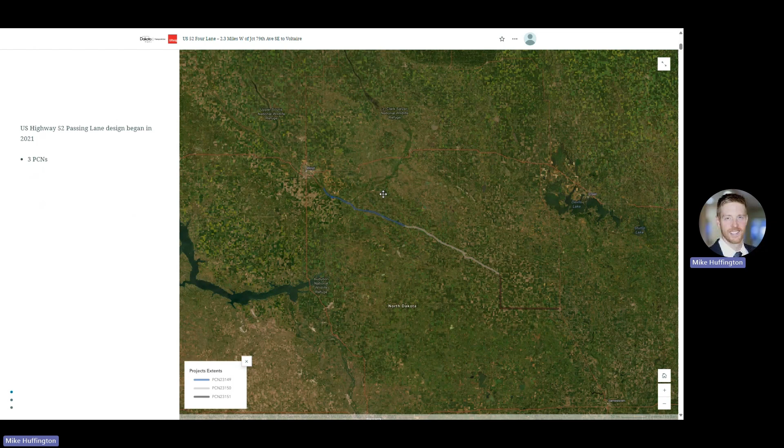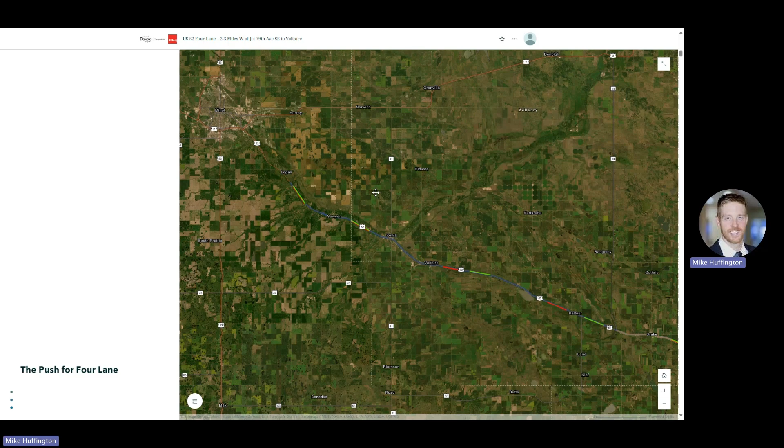So as you can see on your screen along this current corridor, there are eastbound and westbound passing lanes currently installed between Logan and Sawyer, as well as between Sawyer and Velva. As we were going through the project development process for the passing lanes projects, we received a number of public comments really pushing for four lanes, particularly for this segment of US 52 closer to Minot. Local leaders and elected officials heard those concerns, and during the last legislative session, were able to get funding allocated to initiate this four-lane study.

So real quick, I just want to touch on the phasing and schedule for this project. We currently are in phase one, which is the preliminary engineering study. As part of this phase, we're completing initial alternatives development and preliminary engineering, completing a lot of our field surveys, both topographic and environmental, completing a traffic analysis, starting this initial stakeholder and public engagement, and ultimately we will conclude with a decision document.

In phase two, the focus will be on completing an environmental document in compliance with the National Environmental Policy Act, or NEPA. And then finally, phase three, which would be final design, which includes that final design, right-of-way acquisition, and permitting.

Looking at the schedule, phase one is expected to wrap up the end of this year. We'll then be transitioning into developing that environmental document through 2025, which will include additional opportunities for public engagement and comment, and then final design through 2026 and the first part of 2027. I will note this project does not currently have funding for construction, so we do not have an estimated construction timeline.

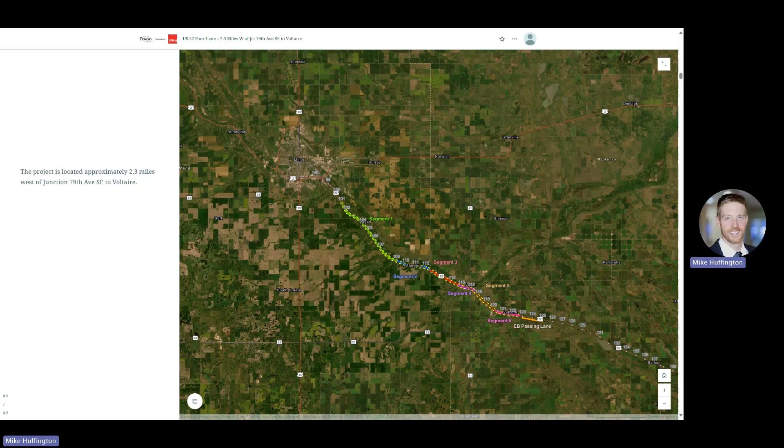Looking at our project corridor, our study area begins near Minot, where the current four-lane section of US 52 ends and goes until just past Voltaire, where it ties into an existing eastbound passing lane that was installed in 2023. We've divided the overall corridor into 6 different project segments, driven primarily by changing constraints and opportunities along the corridor, which I will expand upon in a little bit when we get to the alternatives.

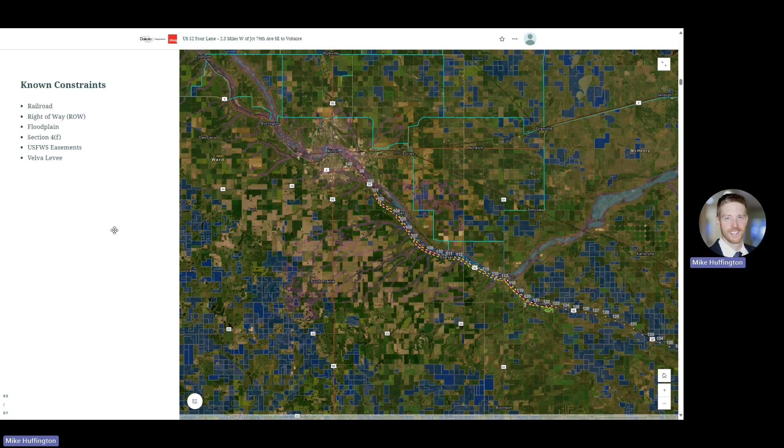As the project corridor begins to parallel the railroad, the amount of existing right-of-way narrows, and there's no longer that excess right-of-way to the south, and throughout the remainder of the corridor, the existing roadway is centered within the current right-of-way. Zooming out and looking at this stretch between Sawyer and Velva, the majority of this segment parallels the Canadian Pacific Rail line and is one of the more constrained segments of the project corridor from a right-of-way perspective.

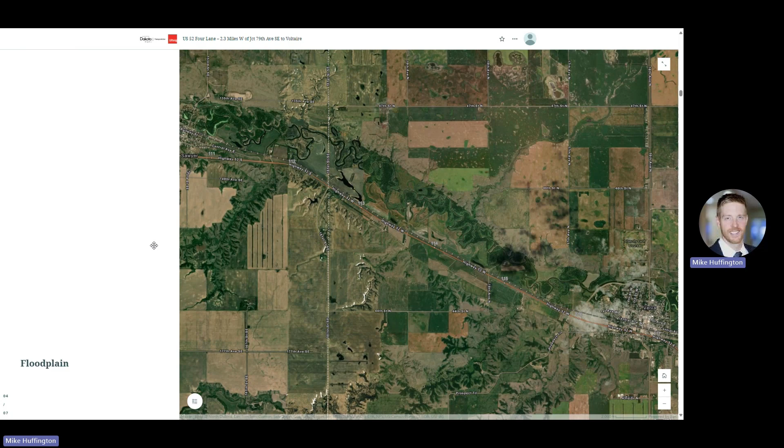Floodplains are another constraint. As you can see in this map, there are a number of FEMA mapped floodplains that cross the project corridor. So as we work through our project design, we will be coordinating with local floodplain administrators, and will ensure that anything we propose is in compliance with floodplain regulations.

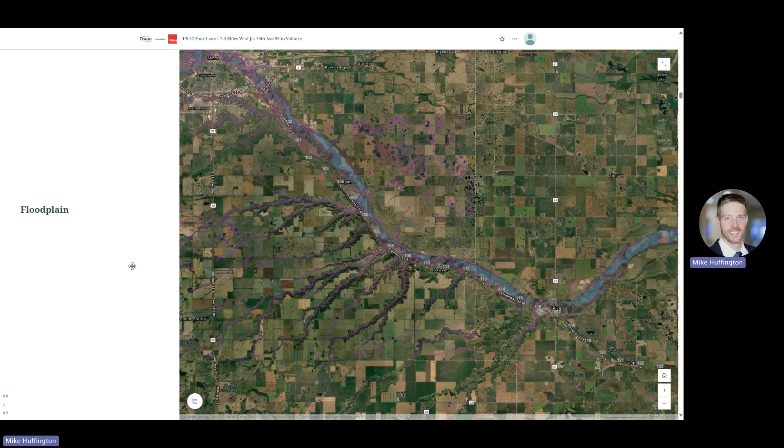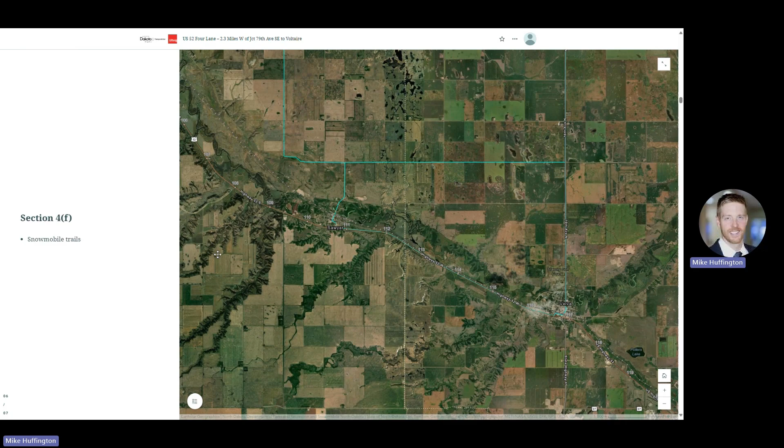Section 4(f) of the Department of Transportation Act provides protection for park and recreation lands, wildlife and waterfowl refuges, and historic sites during transportation project development. Along this project corridor, there is a designated snowmobile trail shown in blue on the screen, which is eligible for protection under Section 4(f). This trail is located within the ditch of US 52 between Sawyer and Velva, and is part of the project. We will need to ensure that use of that trail remains and is not limited or inhibited as a result of the project.

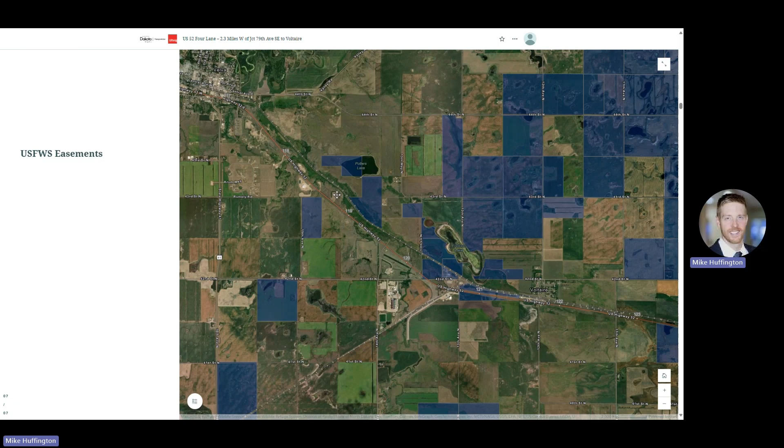As we get closer to Voltaire, there are a number of parcels along the project corridor that are subject to U.S. Fish and Wildlife Service wetland easements. If we are acquiring right-of-way from these parcels, we will need to coordinate with the U.S. Fish and Wildlife Service regarding potential impacts.

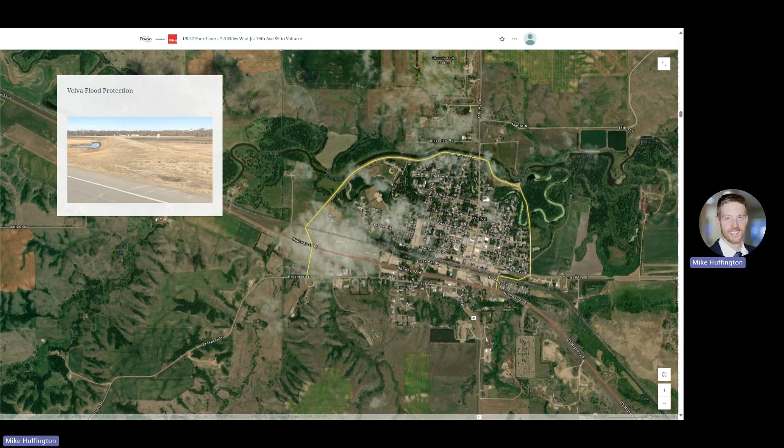Then lastly, the Velva flood protection levee. There is currently a flood protection levee around the community of Velva that crosses US 52 on the west side and abuts US 52 on the east. We have reached out to the U.S. Army Corps of Engineers and have had some preliminary discussions regarding this levee. Based on those discussions, we will need to ensure that our project complies with the Army Corps' Section 408 program, which provides guidance and regulations pertaining to the alterations of civil works projects.

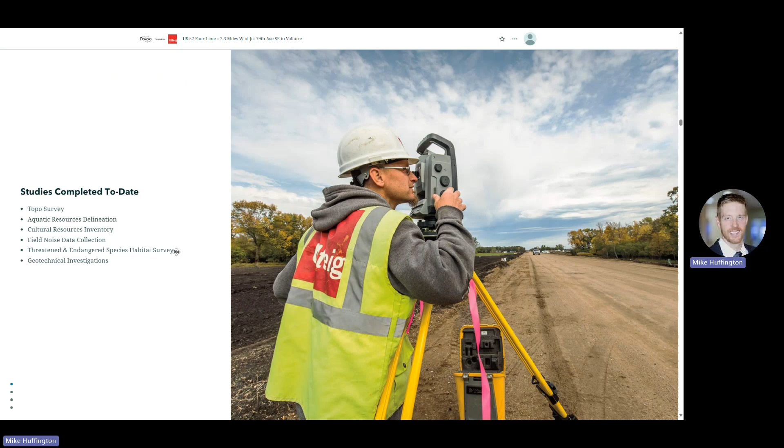I'm now going to touch on some of the studies that have been completed to date, which includes a topographic survey, aquatic resource delineation, cultural resource inventory, field noise data collection, habitat surveys for threatened and endangered species, and geotechnical investigations.

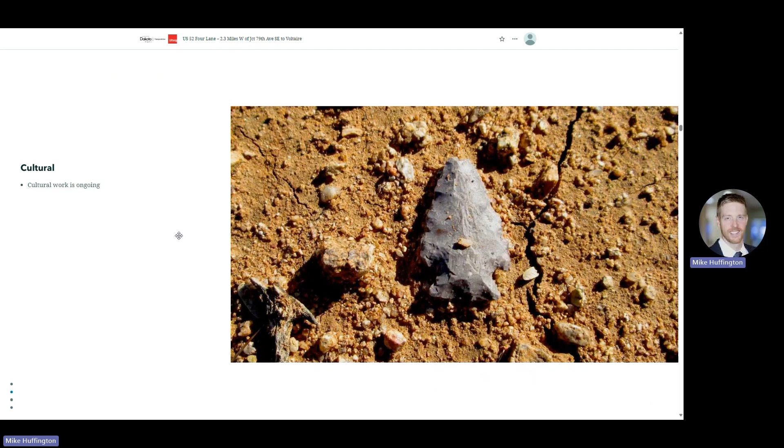Touching on a few of these surveys in a little more depth, the cultural resources work associated with the project is still ongoing, but a number of cultural sites have been identified along the project corridor. Due to federal regulations associated with cultural resources, the location of cultural sites cannot be publicly disclosed, but I will note that some of the cultural sites that have been identified have influenced the alternatives currently under consideration.

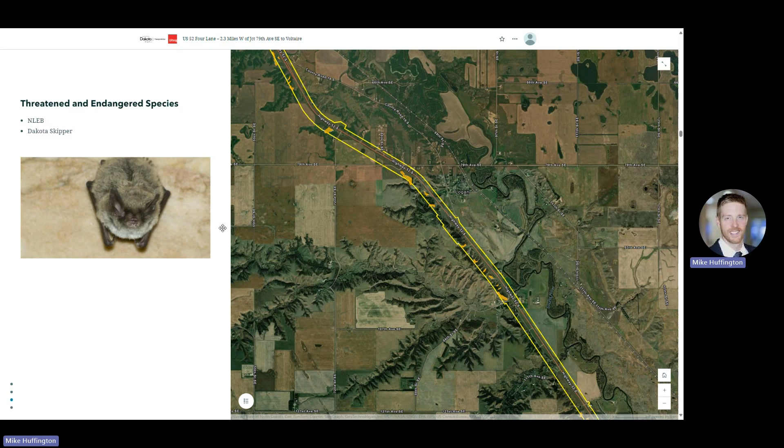Our project team has completed habitat surveys for the federally protected northern long-eared bat and Dakota skipper. Habitat for the Dakota skipper in particular has been identified along the project corridor, and our team will be coordinating with the U.S. Fish and Wildlife Service during the next phase of project development to address any potential impacts to the species.

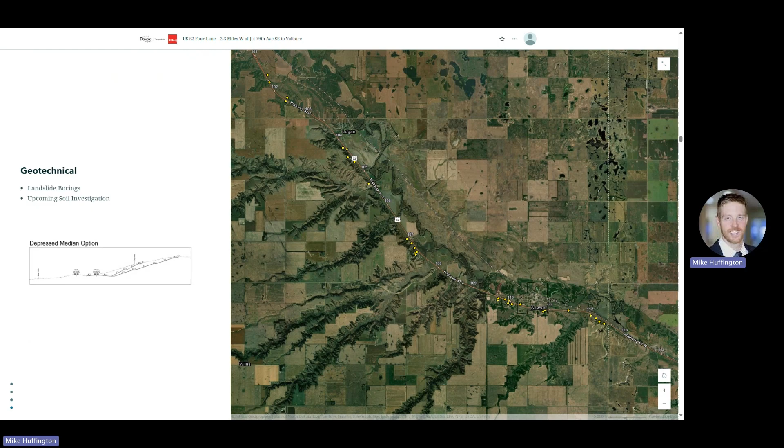Geotechnical investigations are also still ongoing. This corridor has some rough terrain and steep slopes, particularly the portions that parallel the Souris River Valley. The purpose of the ongoing geotechnical investigations is to determine if there are any landslides or actively moving soils along the project corridor, but also to assess the type of soil present along the project corridor to allow us to determine how steep we can go with our inslopes and our back slopes.

As you can see in this figure, if we have soils with a higher shear strength, we can get by with steeper slopes, which really reduces the total footprint of the project and the amount of dirt that needs to be moved.

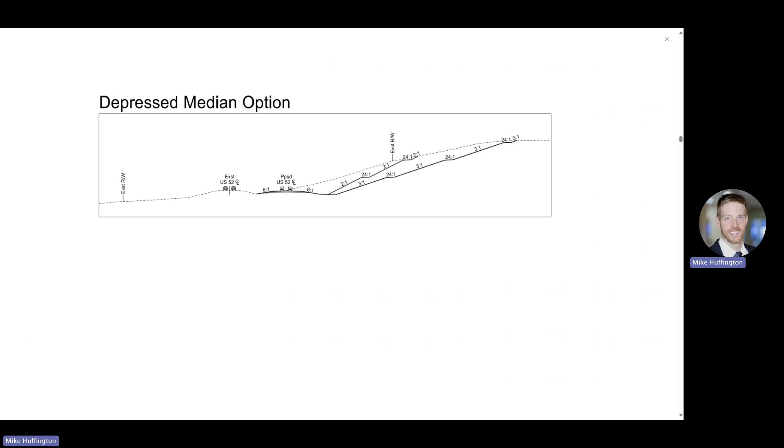Between Logan and Sawyer, current ADTs are just shy of 5,000 vehicles per day. That number drops to about 3,700 between Sawyer and Velva, and then between Velva and Voltaire, we're down to about 2,300. One interesting thing to note is the percent of truck traffic, which ranges from 21 to 32%, which is pretty high. And in fact, US 52 as a whole has one of the highest percentages of truck traffic of all the highways within the state.

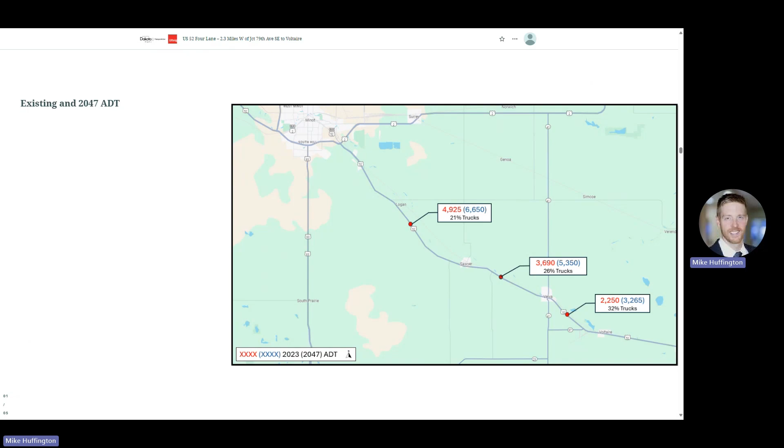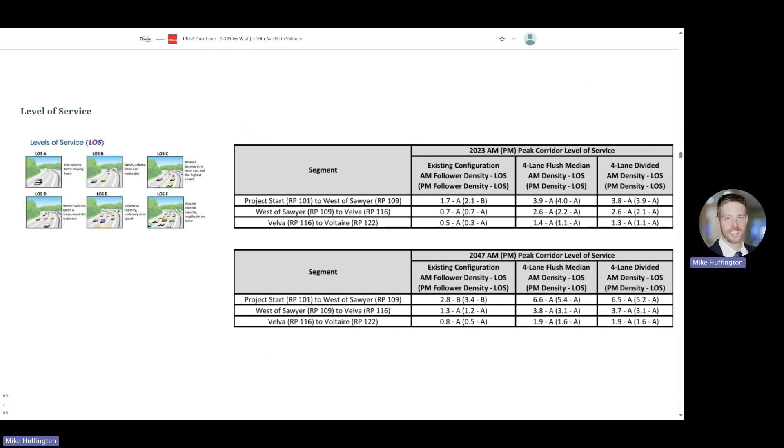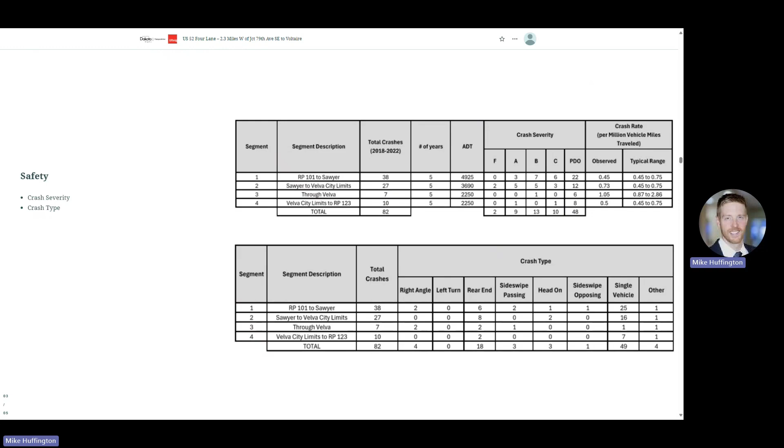Looking at the crash history along this corridor, I want to focus on the two right columns on the upper table, which show the observed crash rate and typical crash rate ranges, which are based on the roadway type. All the observed crash rates fall within typical ranges, but it is worth noting that the segment between Sawyer and Velva is nearing the upper end of that typical range.

So the majority of the overall project corridor is classified as a rural highway, with exception to the urban segment through Velva. This segment has curb and gutter, a reduced 40-mile-an-hour speed limit, and a much higher access density relative to the rest of the corridor.

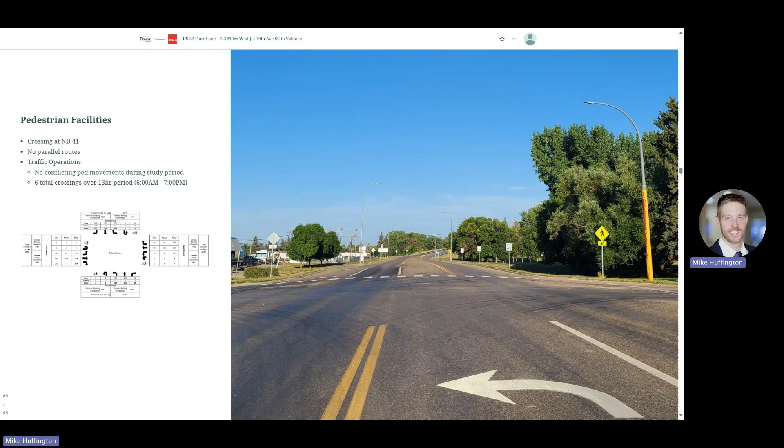Velva also has the only pedestrian crossing along this corridor, which is the crossing located at the intersection of North Dakota Highway 41. There are currently no other parallel pedestrian facilities along the corridor, and based on the pedestrian data collected as part of the traffic operations report, the current pedestrian crossing doesn't appear to see a lot of use, with only 6 total crossings observed over a 13-hour observation period.

As I mentioned previously, this project is really being driven at the local level, so we felt that in addition to our public outreach efforts, we also want to have a smaller working group of local officials and elected representatives to help drive this project in the right direction and provide feedback throughout the project development process.

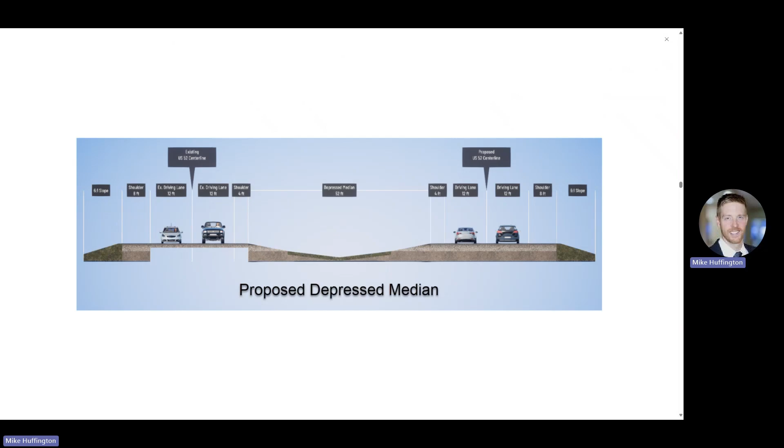So moving on to project alternatives, we really have two primary 4-lane build alternatives, starting with a divided 4-lane with a depressed center median. The typical section for this alternative would be very similar to the current configuration along US Highway 83 between Bismarck and Minot, with two 12-foot driving lanes in each direction separated by a depressed center median and 8-foot paved outside shoulders. This alternative would have a design and posted speed limit of 70 miles an hour.

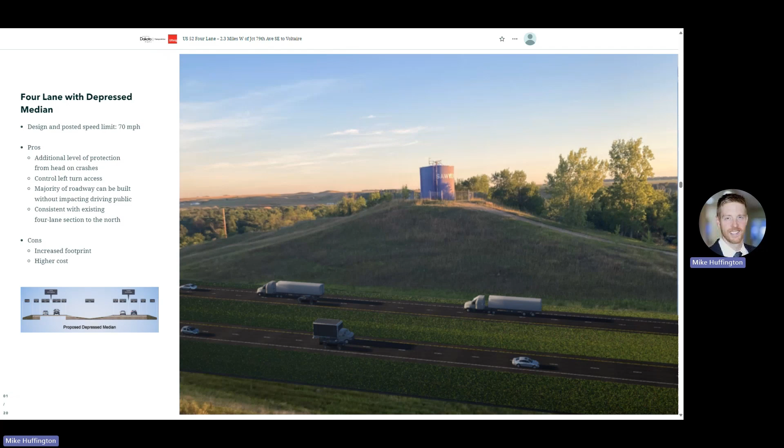Some of the primary pros of this alternative would be an increased level of protection from head-on crashes, controlled left turn access, fewer impacts to the traveling public during construction, and it would be consistent with the current 4-lane section along US 52 as you come into Minot. The cons would be a larger overall footprint and higher overall cost.

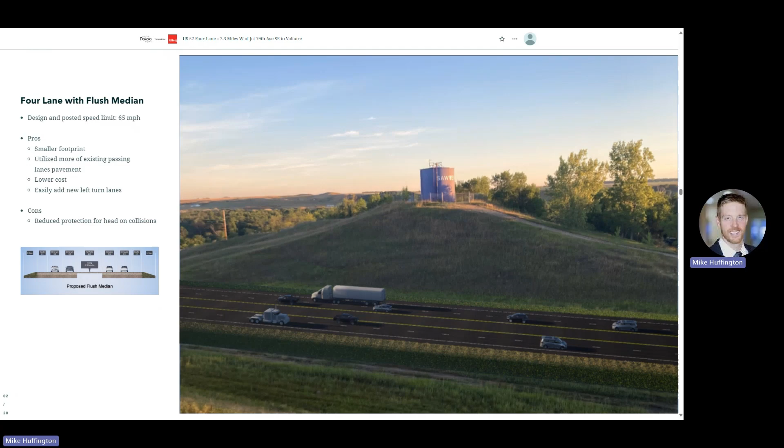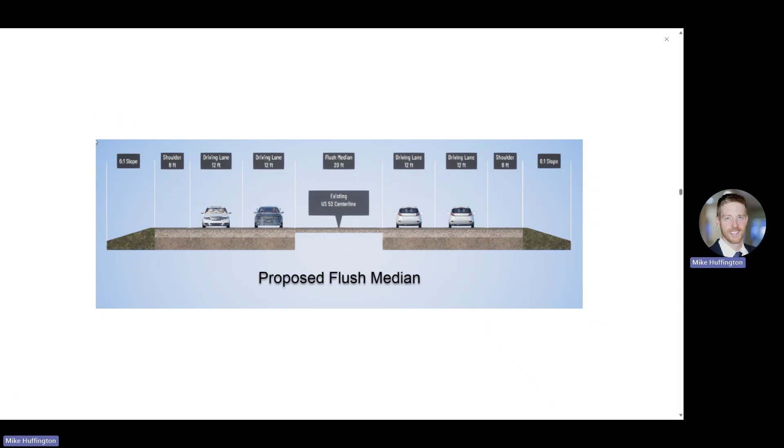Second alternative would be a divided 4-lane with a flush paved center median. This alternative would have the same 12-foot driving lanes in each direction and 8-foot outside shoulders, but instead of a depressed center median, it would have a flush paved 20-foot median. A representative typical section within the state would be what currently exists along US 85 between Watford City and Williston. This alternative would have a design and posted speed limit of 65 miles an hour.

Some of the pros of this alternative would be a smaller overall footprint. It would utilize more of the existing pavement from those recently installed passing lanes, would have a lower cost, and it would be easier to install new left turn lanes in the future. The primary con associated with this alternative would be that reduced level of protection from head-on collisions relative to the depressed median alternative.

As I mentioned previously, we divided the overall corridor into 6 different project segments driven primarily by changing constraints and opportunities along the corridor. We'll now step through each of those segments, highlighting alternatives under consideration for each and some of those challenges and opportunities. The first segment is from the beginning of the project until just west of Sawyer, and the alternatives under consideration for this segment include the depressed median alternative with the new 2-lane being constructed to the south and the flush median alternative.

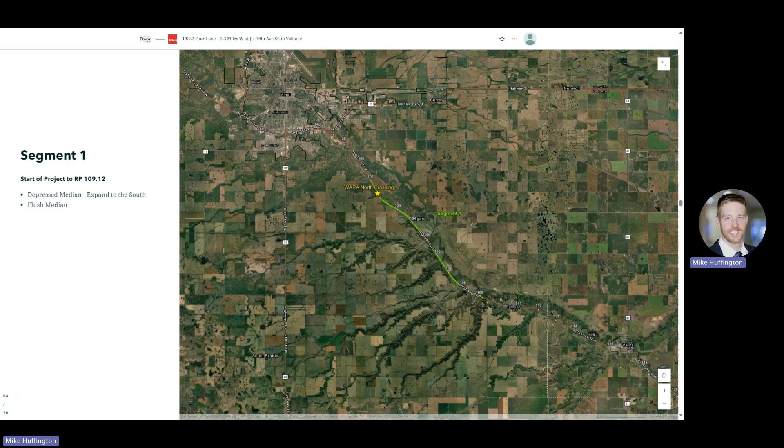The map on the screen has a slider bar that allows us to compare alternative footprints. On the left is the divided depressed alternative. On the right is the divided flush. The area in green represents project construction limits, but I do want to remind you that those geotechnical investigations are still ongoing. So the construction limits that you see on the screen are preliminary and represent a worst case scenario. It is very likely that the majority of those limits will be pulled in and reduced as design progresses.

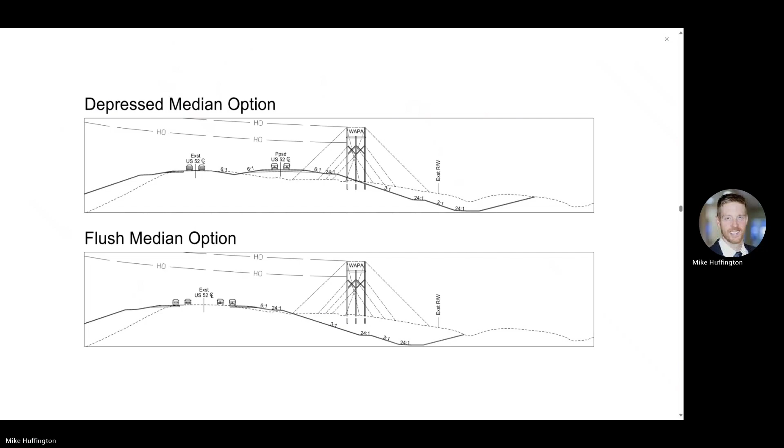So at this location, one constraint that we have is crossing of a large overhead transmission line operated by the Western Area Power Administration, or WAPA. Looking at a cross section of both the depressed and flush median alternatives, both alternatives will result in impacts to that existing south tower. So we will be coordinating with WAPA to properly account for these impacts and any necessary adjustments to that line.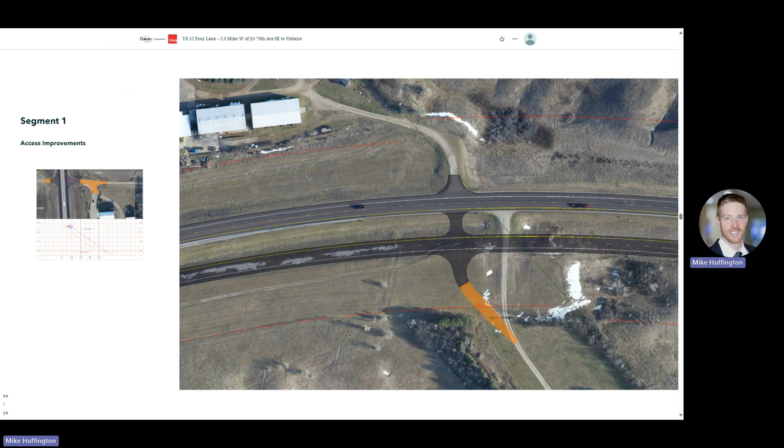Another thing we want to touch on is access improvements. And these improvements are relative to the project as a whole, not just segment 1. As you can see in this figure, we will be looking to try and align offset access points to improve overall operations and also reduce the number of crossovers along the corridor.

Additionally, we will be looking to try and improve the grades at intersecting roadways and approaches. Ideally, we would be looking to maintain a 7% grade or less, and also provide a storage platform at intersections, which is a flatter section right at the intersection that improves driver visibility and also makes merging onto US 52 easier for drivers.

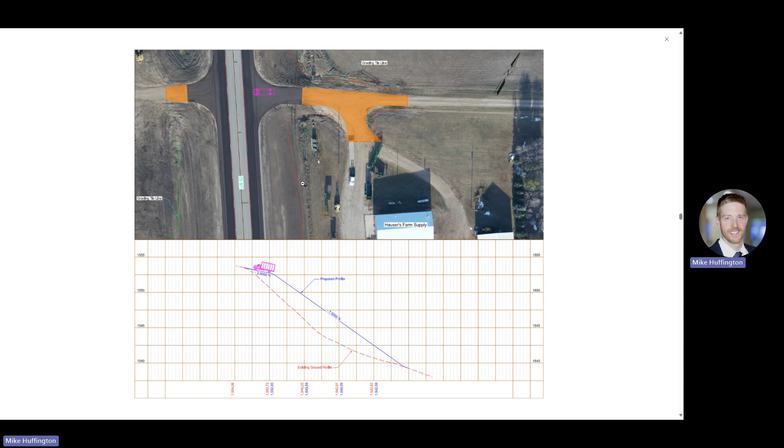Moving on to segment 2. This segment is from just west of Sawyer to the county line between Ward and McHenry counties. The 2 alternatives under consideration for this segment are the depressed median with a new 2-lane roadway to the south and the flush median, but with a shifted crown to the south. So rather than widening the existing roadway evenly on both sides, the widening would be primarily to the south.

The reason for the shifted crown is due to a number of constraints to the north, including the Sawyer Water Tower. Looking at this figure, you can see the middle image shows the flush median option equally expanded to both sides, and due to the existing steep back slope leading up to the water tower, any expansion to the north would result in that water tower being impacted, whereas the depressed median alternative or the flush median alternative with a shifted crown avoids those impacts.

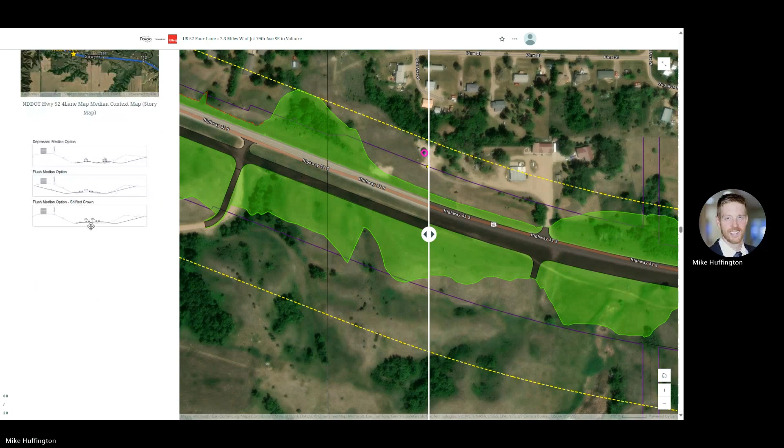As we move on to the Second Avenue intersection, I want to first note that during our stakeholder group meeting, it was mentioned by a few of the stakeholders that the North Dakota DOT should possibly consider closing this intersection at Second Avenue. Closing this intersection is not currently part of the project, but we did want to bring it to the public and allow the public to weigh in on if there is a desire to keep it open or to see it closed.

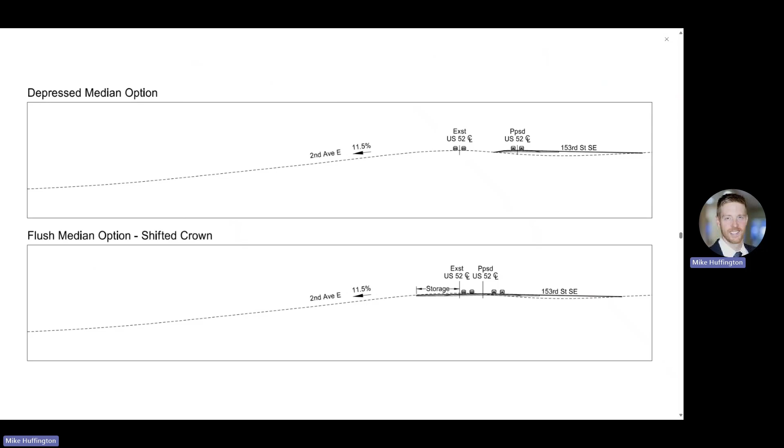The current grade of Second Avenue is quite steep, and there's not currently a storage platform at the intersection. Due to the steepness of that existing grade, if we went with the depressed median option, we would not be able to make any improvements to this intersection. However, the flush median option with that shifted crown would allow for the inclusion of a storage platform at this intersection.

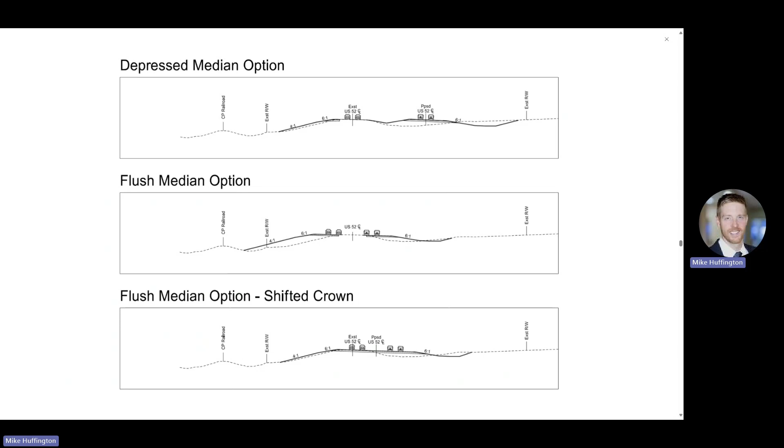As we move to the eastern end of this segment near the county line, this is where the corridor begins to parallel the railroad and our right-of-way becomes more constrained. As you can see in this cross section here, the flush median option in the middle does not have that shifted crown, and we end up encroaching into the railroad right-of-way at several locations. So this is another reason why we went with that shifted crown option along this segment rather than centering on the existing roadway.

Moving into segment 3, this segment runs from the county line to Velva and has the same options under consideration as segment 2 with the depressed median with the new 2-lane roadway to the south and the flush median with a shifted crown. As noted previously, the paralleling railroad to the north is the primary constraint that we are contending with along this segment.

Moving into segment 4, this is the segment through Velva. As I noted, this is our only urban roadway segment along the corridor, and so we have removed the divided depressed option from consideration, as maintaining that depressed grass median would not function well in an urban setting. It would also result in significantly more property impacts due to the larger footprint. So for this segment, we are only looking at a flush median alternative, but have some options for how that might look and function.

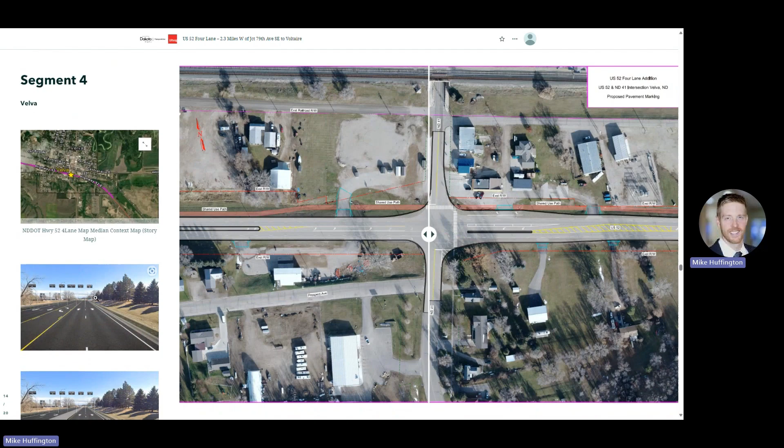So first we'll take a look at the design options for the main line. First option, as you see in this figure, is basically a 5-lane section with that middle lane functioning as a 2-way left turn lane. One additional item to note, and it's relative to all the Velva options, is that we are looking at adding a 10-foot wide shared use path along the north side.

Second option is very similar, but instead of a flush paved center lane, we've added a raised center median. This raised median would give more of an urban feel to this segment and would likely also help with traffic calming, but would still have breaks for left turn lanes as needed through this segment.

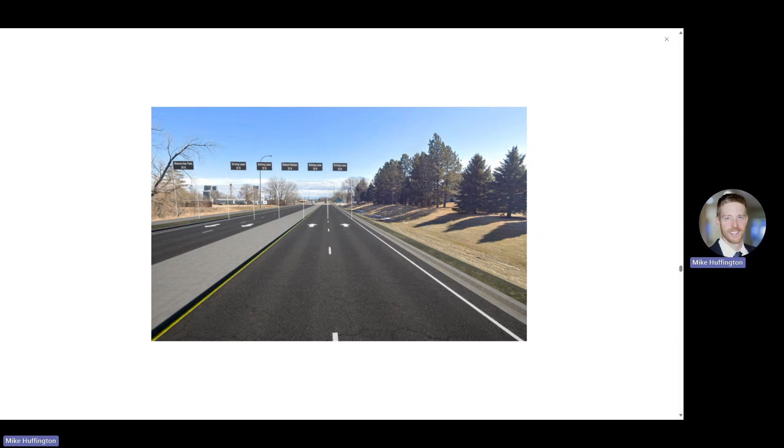Next, we'll take a look at the intersection of US 52 and North Dakota Highway 41. I'm going to start by moving the slider to the left here.

This allows us to see the layout of this intersection with the incorporation of both left and right turn lanes. And I will also pull up a visual rendering to get a better idea of what this would look like. So as you see, you would have your 2 through lanes in each direction, as well as dedicated right and left turn lanes at North Dakota 41.

Now, as we come back and move the slider to the right, the second option is a similar configuration, but without the dedicated right turn lanes. This option would still maintain the center left turn lanes, but right turning movements would occur from the right driving lane. From a traffic operations perspective, this intersection operates better with the right turn lanes, but dropping those turn lanes would reduce the project footprint and would also benefit the north-south pedestrian crossing across US 52 as it reduces the number of traffic lanes that need to be crossed.

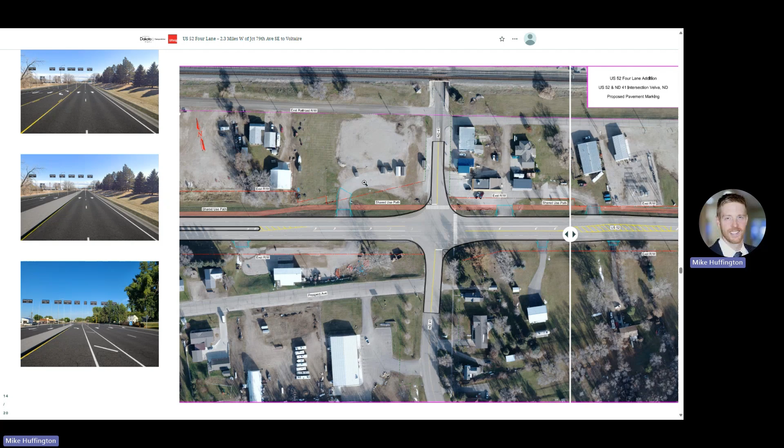Moving on to segment 5, we are looking at the area between Velva and North Dakota Highway 97. And for this segment, the two alternatives we are looking at include the divided depressed, but with the new 2-lane to the north rather than the south, as was the case previously. We were looking at moving to the south, but for this one it will be the new 2-lane to the north, as well as the divided flush median centered on the current roadway.

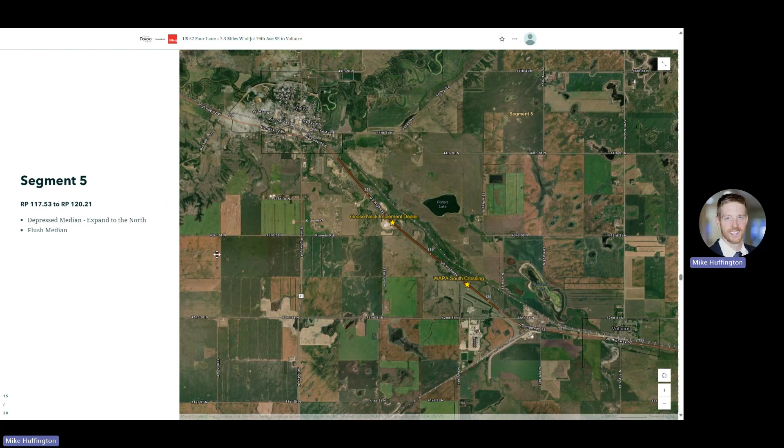We originally looked at both north and south expansion options for the divided depressed median alternative, but expanding to the south would have had significant impacts to that gooseneck implement dealer located on the south side of the roadway. But ultimately, what took the south alternative off the table was the identification of some cultural sites along the south side of the roadway that could not be avoided with a south expansion option.

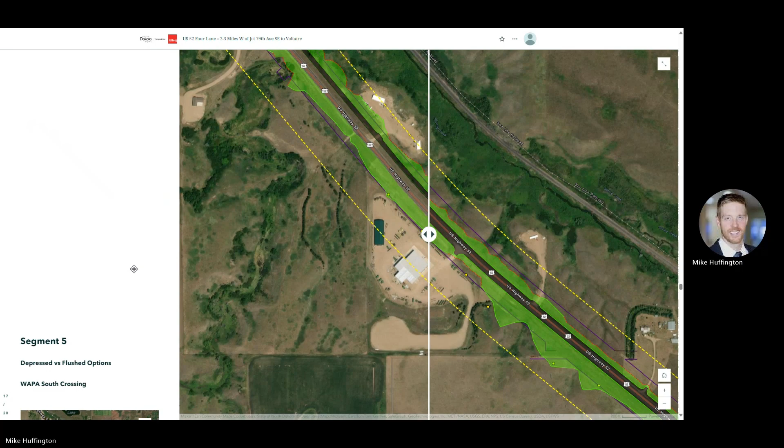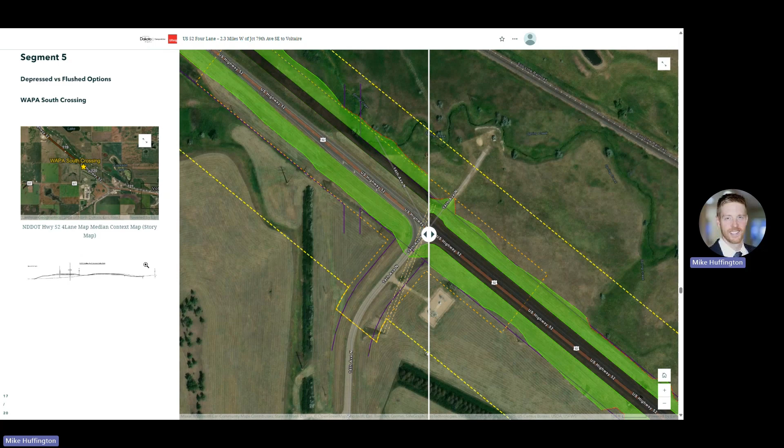As we get towards the southern end of this segment, we do have another WAPA transmission line crossing, as well as a substation. And similar to the previous WAPA crossing, our proposed divided depressed alternative would impact an existing tower. So if this option were selected, we would need to coordinate those impacts with WAPA again and get those towers relocated.

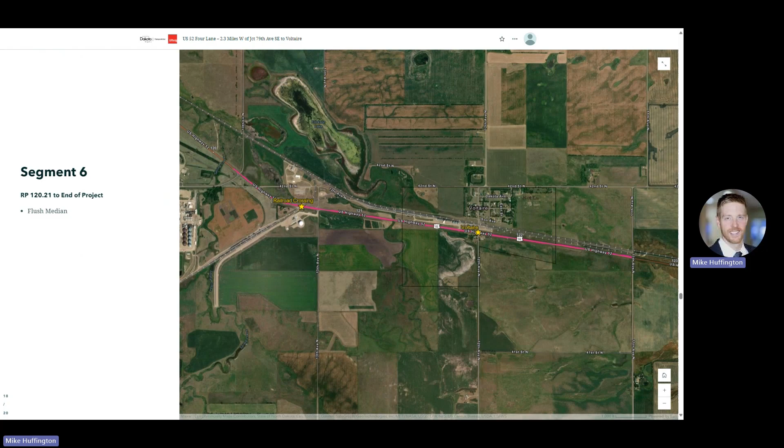And finally, moving on to our last segment, which is segment 6. This segment runs from North Dakota Highway 97 till just past Voltaire, where it would tie into an existing eastbound passing lane that was installed last year. For this segment, we are only considering one alternative, which is the flush median alternative.

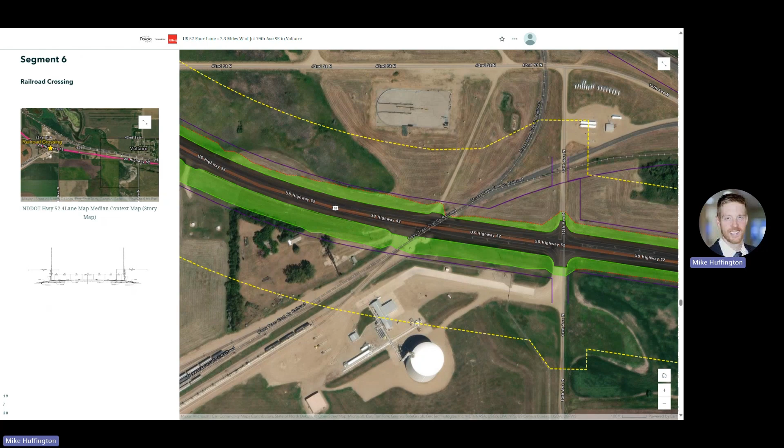Part of the reason we are only looking at the flush median alternative is the fact that we need to cross the railroad. As part of a separate project, the NDDOT will be adding acceleration and deceleration lanes at this railroad crossing. So effectively, we will already have the railroad profile established and should hopefully not need to reconstruct this crossing.

As we move to the east, where we really become constrained is here near Voltaire, where we have Dakota Midland Grain to the north, and we have a couple of residences located very near the highway to the south. It just is not feasible to fit in a divided depressed roadway without significant negative impacts to these properties. So that brings us through the project corridor.

I want to just quickly look at some impact comparisons for the various alternatives. But before doing so, just want to again caveat that we are still waiting on completion of geotechnical investigations and have really not yet gone through the full effort of minimizing and reducing impacts. So the figures we present here are more or less representative of a worst case scenario and will be refined as the study progresses.

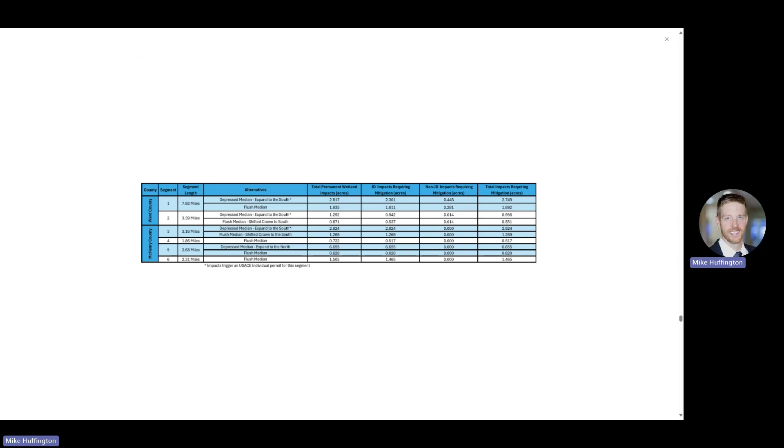Taking a look at wetland impacts, again, we've not yet gone through the effort of trying to minimize these impacts, but currently we're looking at upwards of 15 acres of wetland impacts. So we are anticipating that wetland mitigation will be required and likely the need to acquire an individual permit from the U.S. Army Corps of Engineers.